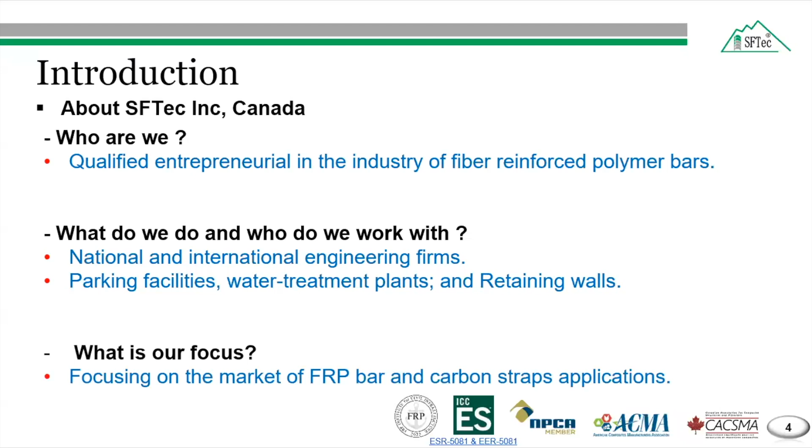So we focus on parking facilities, water treatment plants, retaining walls. Our focus is mainly on glass fiber reinforced polymer bars.

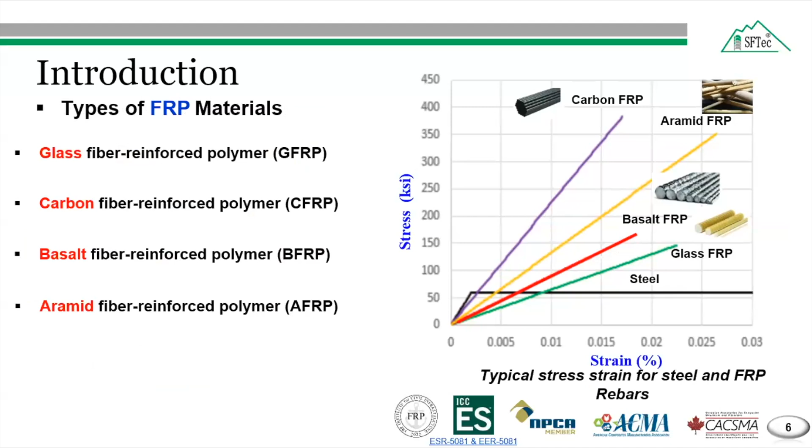There are basically four types of fiber used in fiber reinforced polymer bars: glass, carbon, basalt, and aramid. Glass is widely available nowadays and used in most projects in North America.

We can produce different types of FRP products depending on project requirements. Some of the FRP bars we produce are straight bars, spiral, stirrups for transverse reinforcement, bent bar, and glass fiber reinforced polymer shear connectors.

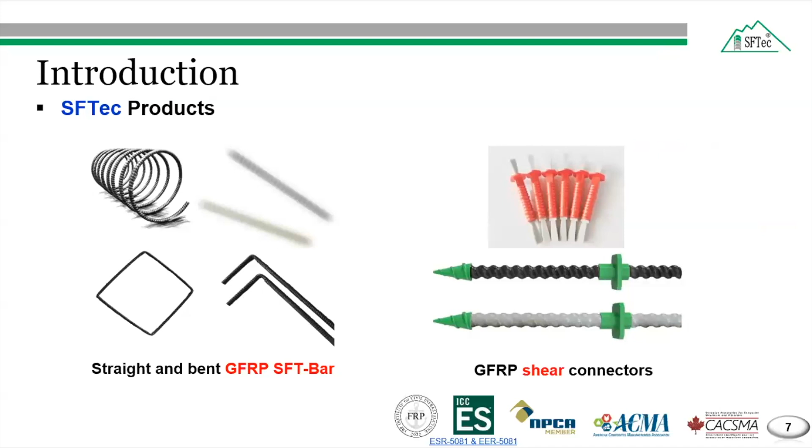Some advantages of the SFTec glass fiber reinforced polymer bar: it has a longer service life because of its corrosion resistance, therefore improved durability in harsh environments such as construction near coastal areas in North American cold climates. The FRP bar has better resistance against corrosion compared to the steel bar.

The tensile strength of FRP bar is around 2 to 3 times more than that of the normally used steel bar.

FRP bars are lighter due to low density compared to the steel bar. Their density is around a quarter of the density of steel.

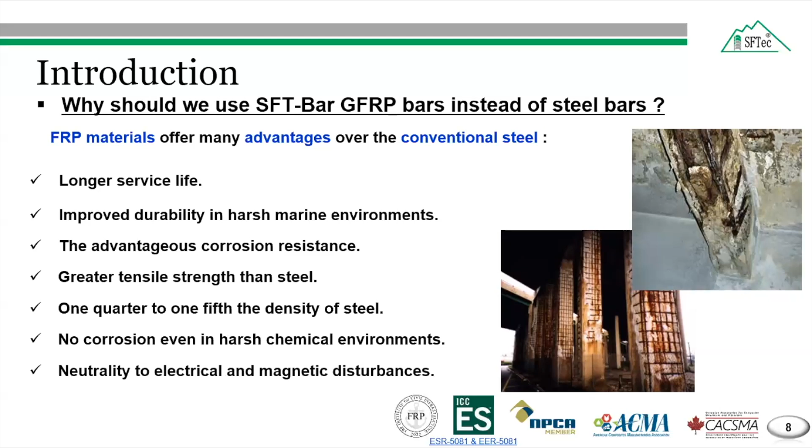Due to corrosion resistance, FRP bar is good for harsh chemical environments as well, and it is neutral to electric and magnetic disturbance, useful for applications such as in airports, military applications, or MRI rooms in hospitals.

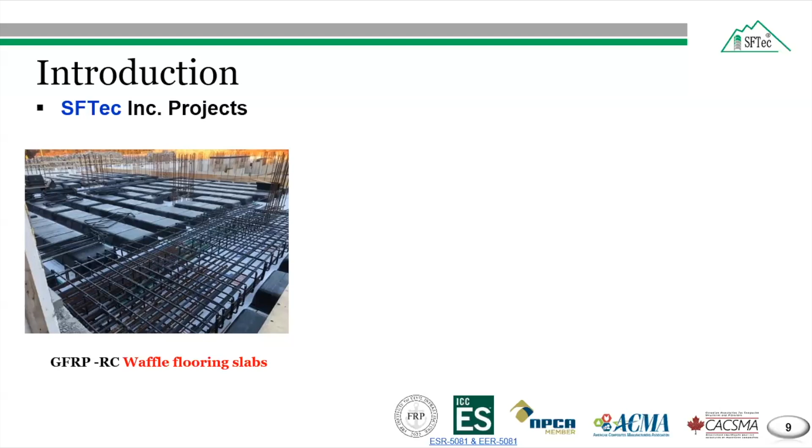Some selected field applications of the SFTec FRP bar we have already done in Canada: a GFRP bar reinforced concrete waffle flooring slab designed with SFTec glass fiber reinforced polymer bar, built in Halifax, Nova Scotia.

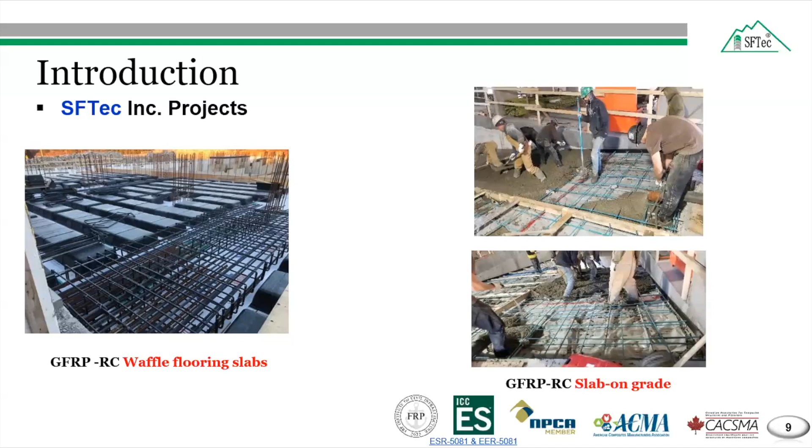It can also be used on slab on grades or slab on grounds, as a non-structural slab. It is a one-to-one replacement and saved a lot of money compared to steel bar in terms of labor and transportation.

Another project is cast on-site precast sandwich panels, where they used our glass fiber reinforced polymer bar as the reinforcement.

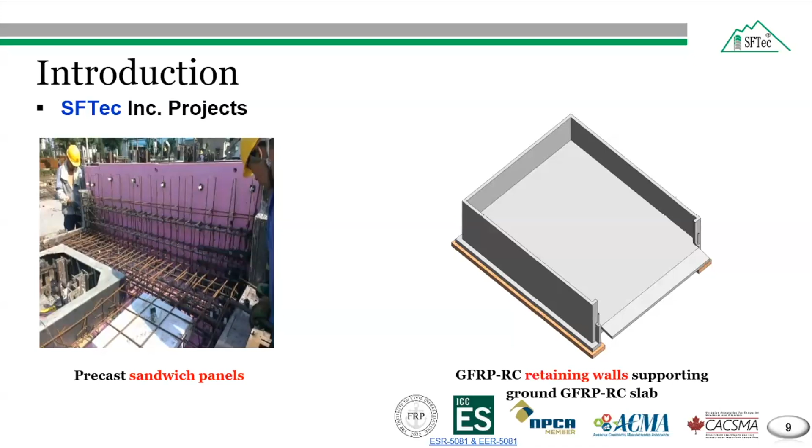On the right is a retaining wall built for the city of Montreal, designed to dump snow with de-icing salt during the winter. They built this retaining wall with SFT glass fiber reinforced polymer bar, which provides resistance against the chemicals used in the de-icing salts.

Coming to the first part of the webinar on SFT-Bar certification: the ICC-ES ESR-5081 certificate evaluates the SFT-Bar, and the scope of evaluation is compliant with the 2021 and 2018 International Building and International Residential Code.

According to the evaluation report, the SFT-Bar is used as tension reinforcement, such as in flexural concrete members, beams, shallow foundations, one-way or two-way slabs. It can also be used as vertical reinforcement in concrete columns and walls.

The SFT-Bar can also be used when engineering design is submitted in accordance with IRC section R301.1.3, and it is approved by the building official in accordance with IRC section R104.11.

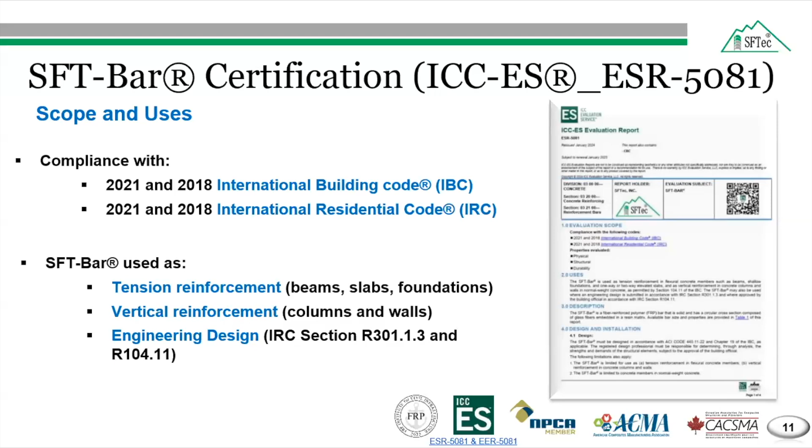ICC uses acceptance criteria AC 454 for fiber reinforced polymer bars for internal reinforcement of concrete structures. The scope of the test program was determined following the requirements given within table 1.2 of ICC AC 454, and it determined the physical, mechanical, and durability properties.

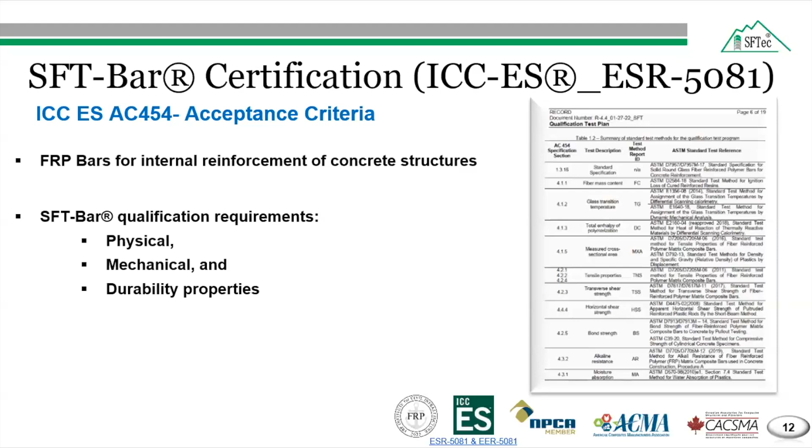The test requirements for all these physical, mechanical, and durability properties are presented in the following slides. Starting with physical properties, four different kinds are required for certification: cross-sectional area, fiber mass content, moisture absorption, and glass transition temperature.

The glass fiber reinforced polymer used in the current certification was produced according to the pultrusion process and made of continuous glass fiber embedded in vinyl ester resin matrix. All the GFRP bars in the study had a helical wrap surface to increase the bond between the bar and the concrete.

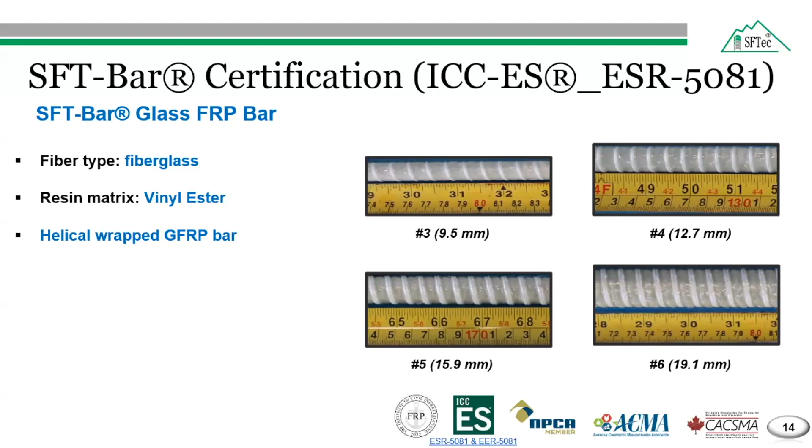Four different types of GFRP bar were investigated: number 3, number 4, number 5, and number 6, which have a nominal diameter ranging from 9.5 millimeters to 19.1 millimeters.

So the volumetric method is used to measure the cross-sectional area, due to the external surface coating of the GFRP bar it doesn't allow calculating an adequate cross-sectional area. The specimen were tested in accordance with the ASTM D7205 and ASTM D792 standards.

The ASTM D792 is used to compute the specific gravity or density of the specimen. The instruments used in the test were a cylinder and measuring scale. The specimen were weighed with an analytical balance to 1 milligram precision.

So 8 samples from each production lot were tested. The total number of lots were 3, and the total number of samples was around 24. Each fiber reinforced polymer specimen was weighed with an analytical balance to 1 milligram precision, and its length carefully measured with a measuring scale.

The specimen were placed in a graduated cylinder filled with water and weighed. Finally, the cylinder was filled with water and weighed.

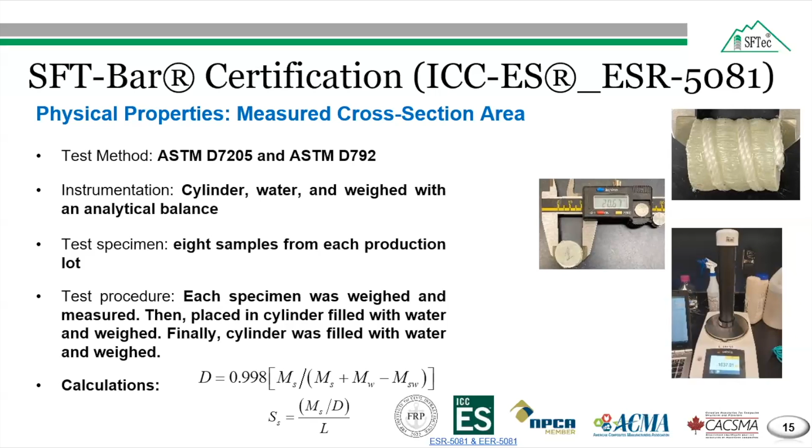The cross-sectional area of the specimen surface in square millimeters was calculated using the second equation, where D is the density of the specimen and 0.998 is the density of water at room temperature. MS is the mass of the specimen, MW is the mass of the water in the cylinder, MSW is the mass of the water and specimen in the cylinder, and L is the length of the specimen.

For the tested helical wrap glass fiber reinforced polymer bars, the averaged measured cross-sectional area was greater than the nominal cross-sectional area as shown in this table, and it was within the required cross-sectional area according to the AC454 acceptance criteria, based on table 3 of ASTM D7957. The AC454 acceptance criteria suggest that requirements should be met according to ASTM D7957.

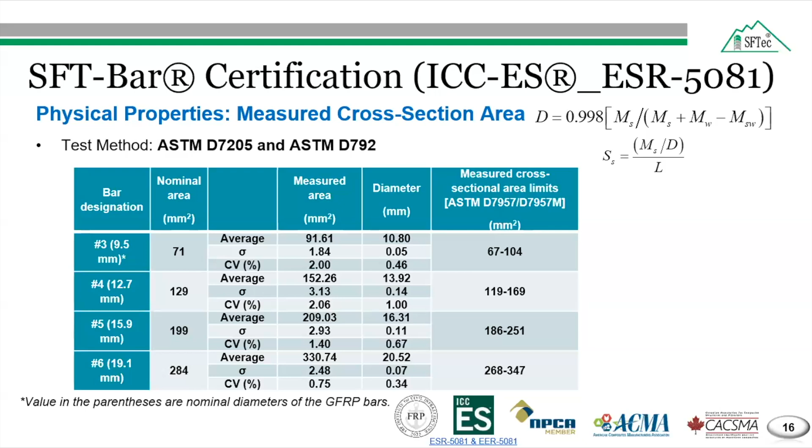In the second test, the fiber content of the GFRP bars was measured, which is an important parameter that determines its mechanical properties. The specimen were cut to 1 inch for fiber mass content and tested in accordance with ASTM D2584.

The instruments used in the test were a muffle furnace capable of maintaining at least 600 degrees Celsius, a desiccator to cool the specimen, and the specimen were weighed with an analytical balance. The 1 inch FRP samples were heated at 565 degrees Celsius until the carbonaceous material disappeared, and the remaining residue was cooled and weighed.

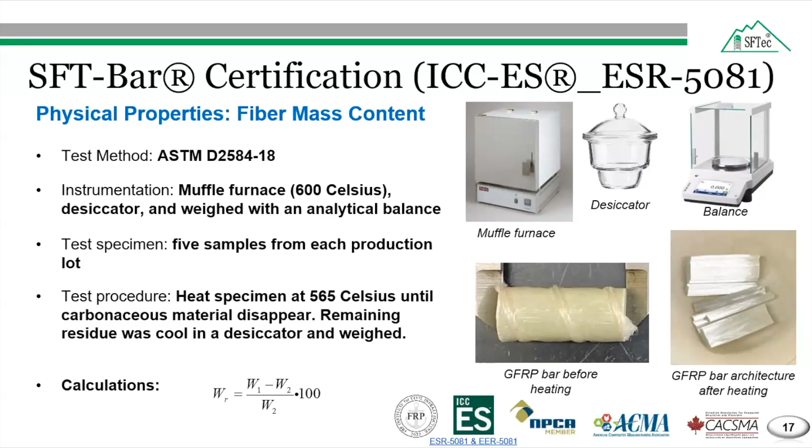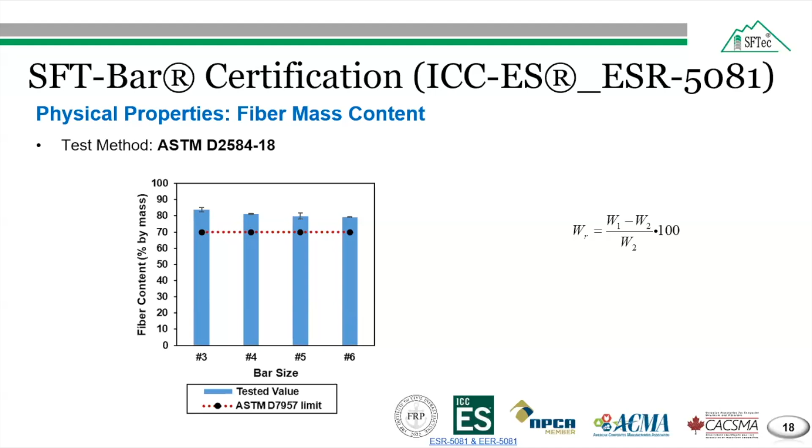The fiber content by weight percent was calculated using the following equation, where W1 is the weight of the specimen and W2 is the weight of the residue. For the tested glass fiber reinforced polymer bar, or the SFT-Bar, the average fiber content was found to be higher than 70%, which is required in ASTM D7957.

The moisture absorption test is important, aimed to prevent excessive moisture absorption that can weaken the bar. This test is important because it tells us what kind of resin is used in our bar, like vinyl ester or polyester resin, so it helps distinguish the type of resin matrix.

The FRP specimen were tested in accordance with the water absorption procedure 7.4 in ASTM D570. The instruments used in the test were a drying oven capable of maintaining the required 50 degrees Celsius, and a water container was used for the absorption. The specimen were weighed with an analytical balance.

The specimen were initially dried in an oven for 24 hours and weighed after cooling in a desiccator. This weight was called the condition weight. After conditioning, the specimen were placed in distilled water kept at 50 degrees Celsius.

The first weighing occurred after 24 hours, then the specimen were immersed in water again. Then we extracted and weighed it every week until we reached the saturation level. Saturation was confirmed when the increase in weight over 3 consecutive measurements was less than 1%.

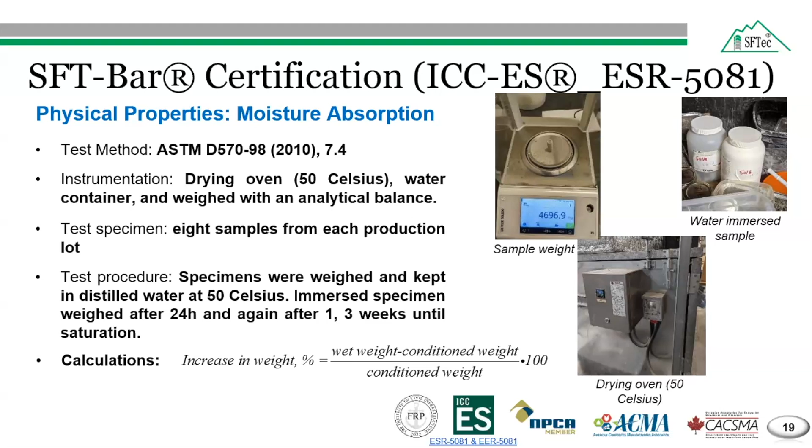The SFT-Bar specimen were tested in accordance with ASTM E1356 to find the glass transition temperature.

The instrument used in the test was a differential scanning calorimeter with aluminum pans. The specimens were weighed, and small size specimens were cut and placed in the heat chamber, which was kept under a nitrogen flow during the scanning procedure. A heating rate of around 10 degrees Celsius per minute was applied.

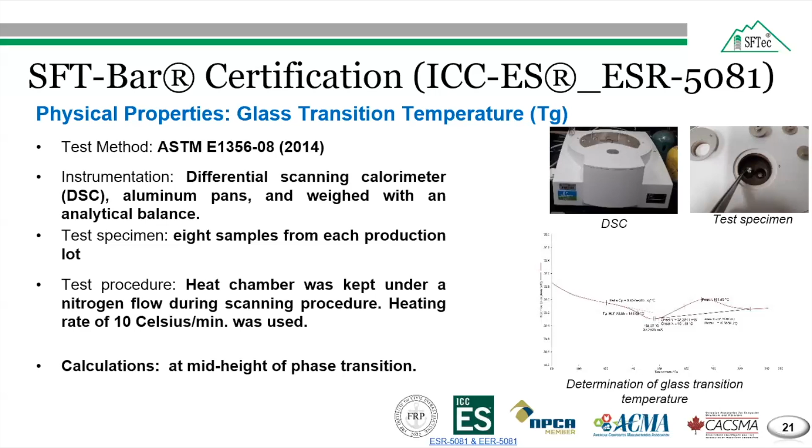The value of the glass transition temperature was taken at the mid height of the phase transition as shown in this figure. For the SFT GFRP bar, the average measured glass transition temperature was greater than the 100 degrees Celsius requirement in ASTM D7957.

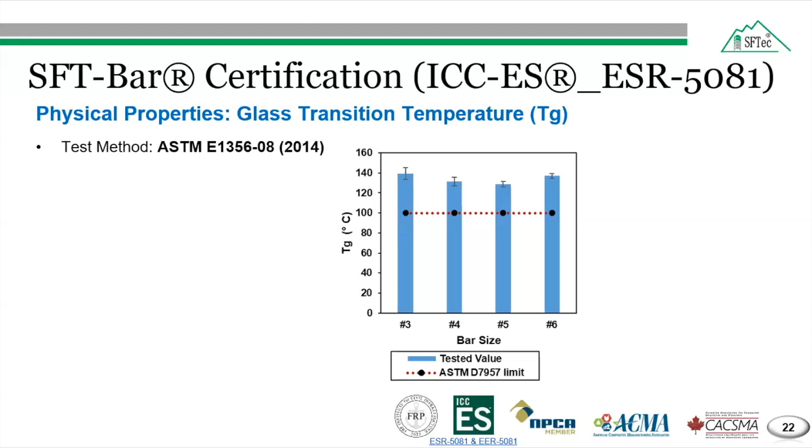Now coming to the mechanical properties, which includes tensile properties, transverse shear strength, and bond strength through pull-out test. The longitudinal tensile properties of FRP specimens were tested in accordance with D7205, and the instrument used in this test were Baldwin testing machine and an extensometer for displacement recording.

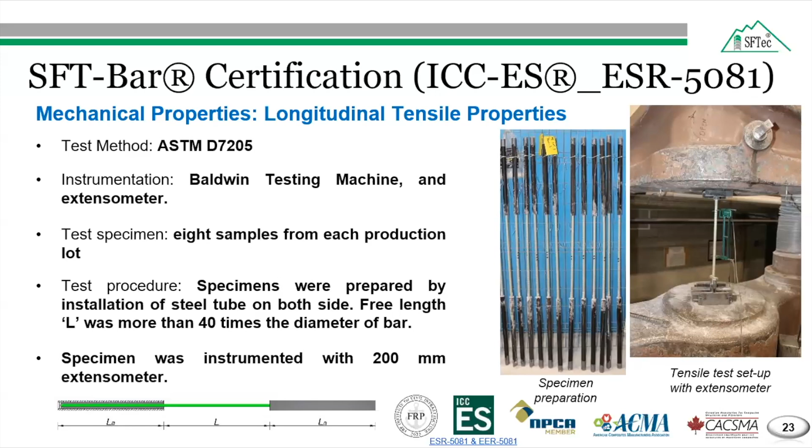The test specimen was prepared by installation of steel tube on both sides of the FRP sample using expansive cement, and the free length was more than 40 times the diameter of the bar. The specimen was instrumented with a 200 millimeter extensometer to capture the specimen elongation during the test, and this test was carried out using the Baldwin testing machine.

The tensile load was applied until failure occurred, and the applied load and the bar elongation were electronically recorded using a data acquisition system. The tensile strength of the FRP bar can be calculated according to the following equation, where Fu is the tensile load in Newton and A is the cross-sectional area of the tested bar in square millimeter.

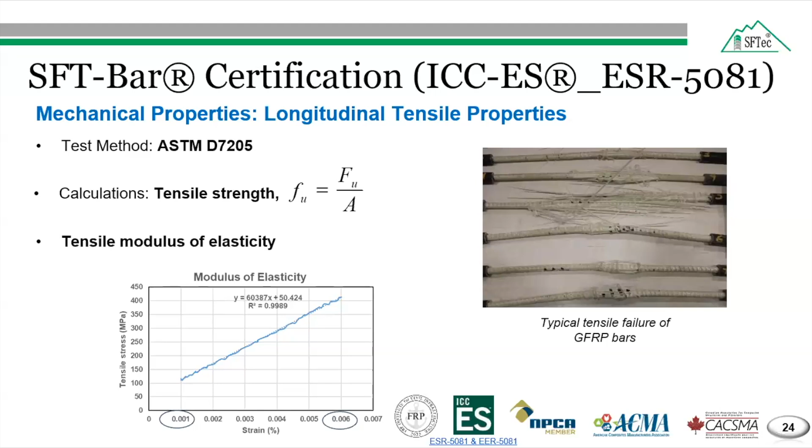The tensile modulus was calculated by fitting a straight line to the data using the method of linear least square regression analysis. The strain range selected for the fitting line was within the lower half of the stress strain curve, with the starting point at a strain of 1000 microstrain and end point being 6000 microstrain.

For the helical wrap glass fiber reinforced polymer bars, the guaranteed tensile properties were greater than the requirement in the ASTM D7957. Here the guaranteed properties means the mean tensile load minus 3 times the standard deviation.

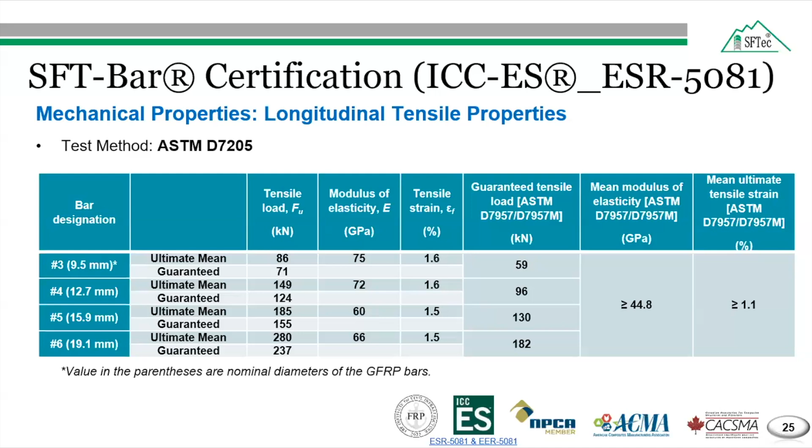The transverse shear strength of FRP specimens were tested in accordance with the ASTM D7617. The test apparatus consists of two bar seats, two lower blades, and two guides machined from steel. These parts are bolted together with two threaded rods, washers and nuts as shown.

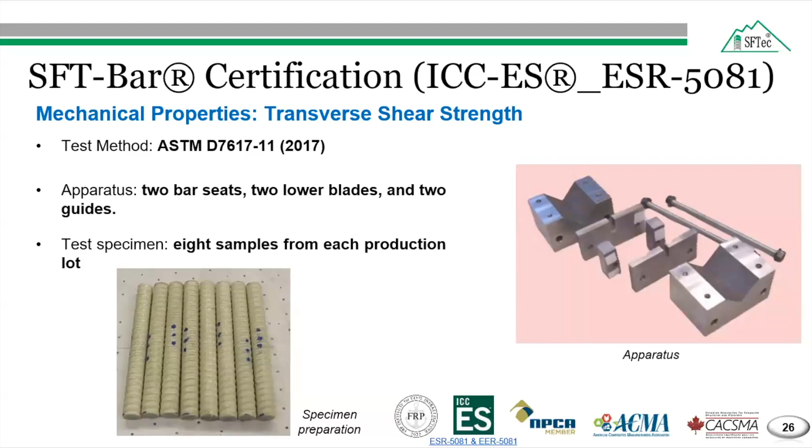The upper blade is loose and is fit into the bar prior to the testing. The length of each specimen, irrespective of the bar size, was 225 millimeter or 9 inches. The specimen was centered within the shear apparatus, resting against the bar seats and lower blades. We placed the upper blade into the bar and centered the apparatus in the MTS universal testing machine.

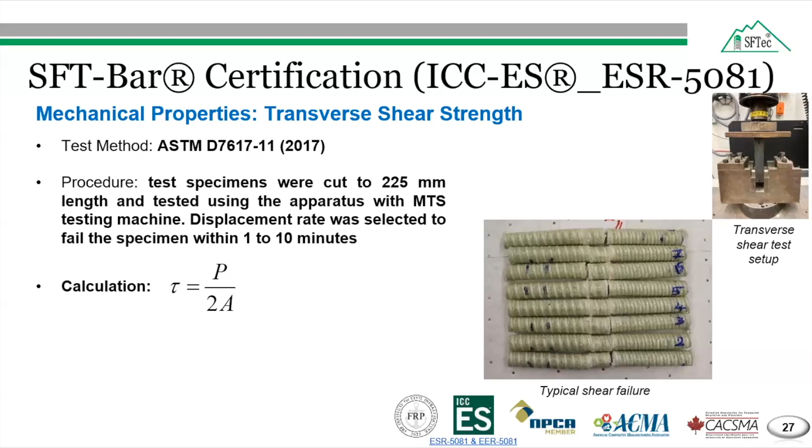The displacement rate was selected so that the product should fail within 1 to 10 minutes, and force was applied uniformly without subjecting the specimen to impact. After testing the samples in the shear apparatus up to failure, the transverse shear strength was calculated using this equation, where P is the failure load in Newton and A is the FRP bar area in square millimeter.

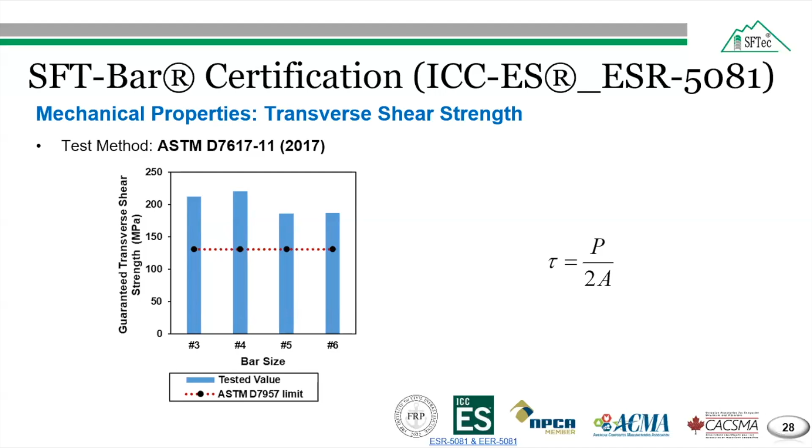For the SFTec GFRP bar, the average transverse shear strength was greater than the 131 megapascal requirement in the ASTM D7957. Coming to the last mechanical property test, the pull-out test, which was performed to measure the bond strength between the reinforcing bar and the concrete.

The test apparatus consists of a bond testing machine, loading plate, LVDT at fixed and free end to measure the displacement, concrete mold, and steel tube.

ASTM D7957 allows bond testing on either odd or even bar size designation if a range of identical produced bar is offered. Therefore, the pull-out tests were conducted on GFRP bar number 3 and 5, which are the odd bar sizes.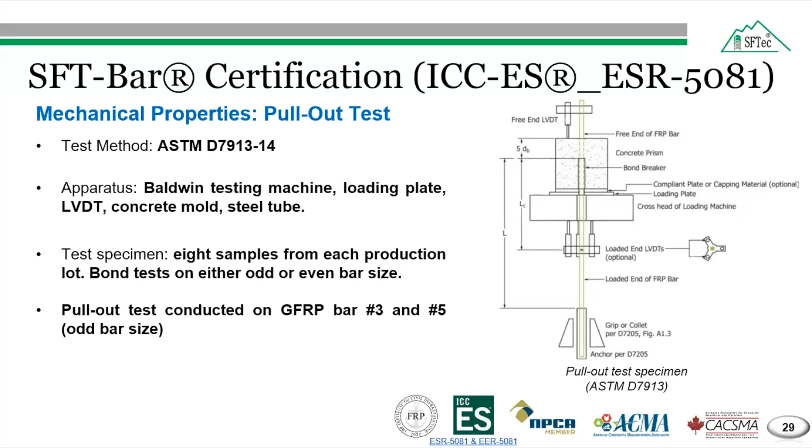The GFRP bars were embedded in the concrete blocks after applying the steel pipe anchor to one end of the bar as shown in this figure. The free length of the GFRP bar between the block and the anchor was approximately equal to 40 times the diameter of the bar.

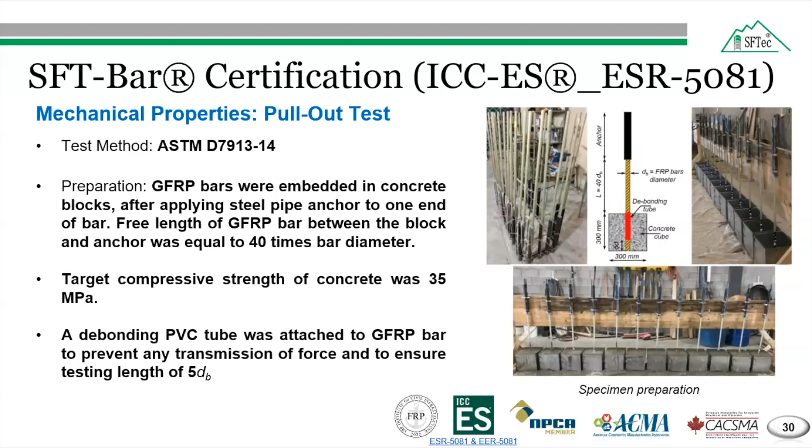All the test specimens were prepared using one concrete batch, having a target compressive strength of 35 megapascal. A debonding PVC pipe was attached to the GFRP bar to prevent any transmission of force by the bond between the bar and the concrete, to ensure a testing length of 5 times the diameter of the GFRP bar.

A displacement control test was conducted at the rate of 20 kilonewton per minute using the universal testing machine. The GFRP bar slippage was monitored using one linear variable differential transformer, and the applied load and bar slippage were recorded automatically throughout the test with a computerized data acquisition system.

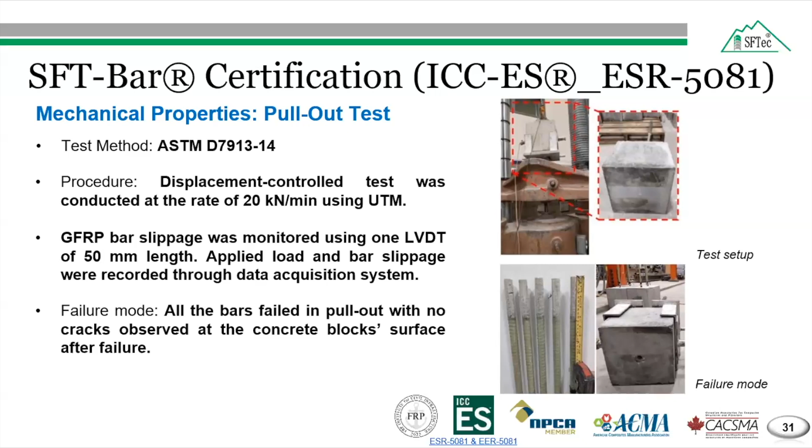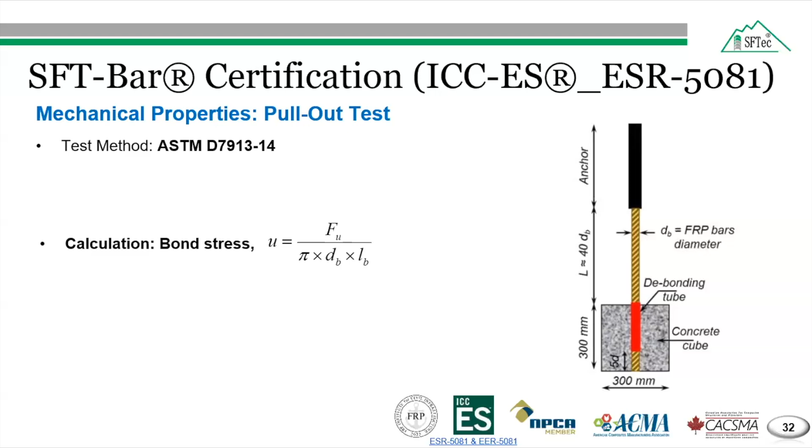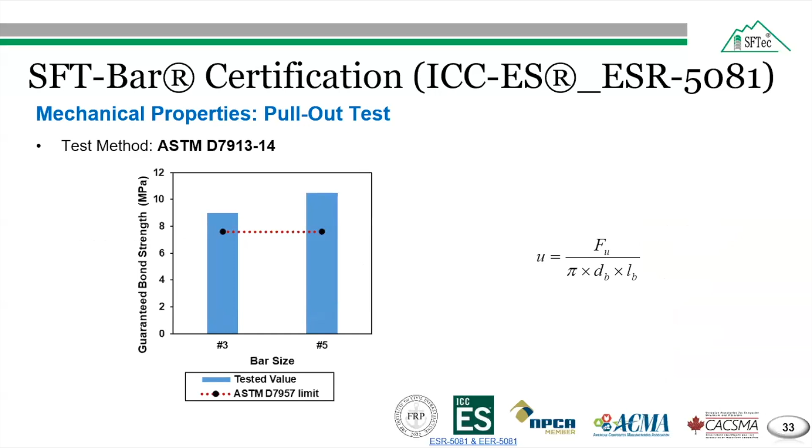All the bars failed in pull-out failure with no cracks observed at the concrete block surface after failure. The bond stress at the peak load was calculated assuming a uniform bond stress distribution along the embedded length of the GFRP bar in concrete, equal to 5 times the nominal diameter of the bar. For the SFT-Bar, the average bond strength was above the requirement of around 7.6 megapascal as per ASTM D7957, and both number 3 and number 5 exceeded this requirement.

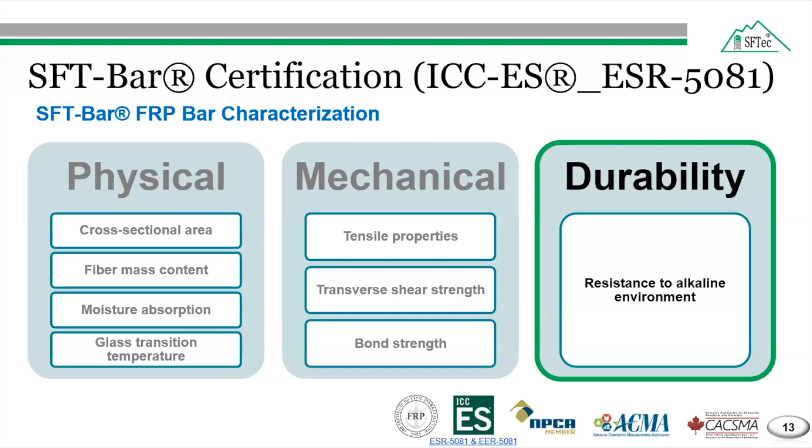The only durability or aging property required on the SFT-Bar for certification was the alkaline resistance without any applied sustained load. The alkaline resistance of the SFT-Bar was determined post-accelerated aging exposure immersed in a high pH solution without any applied sustained load, as per ASTM D7957. The instruments used were the Baldwin machine and extensometer for displacement recording and a chamber to maintain 60 degrees Celsius temperature.

Once exposed in a high pH solution, the testing process which followed was according to ASTM D7205, for the tensile properties of the FRP bar. The ASTM D7957 allows alkaline resistance testing on either odd or even bar sizes, so the alkaline resistance test was conducted on GFRP bar number 3 and 5 only.

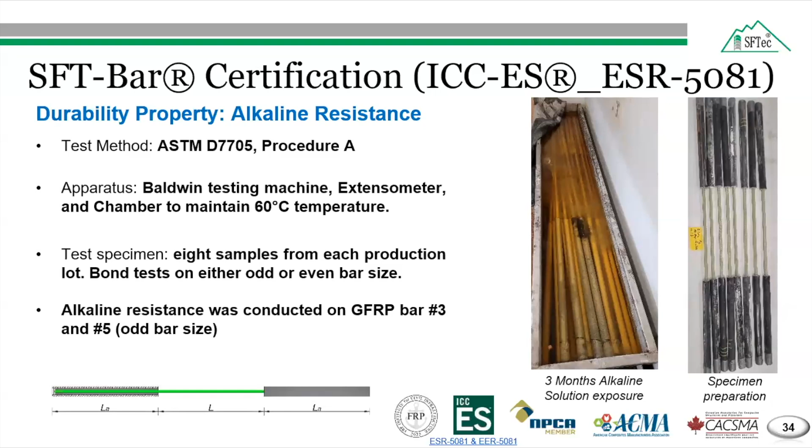The test specimen was prepared similarly to the tensile property preparation after exposure. We installed steel tubes on both sides of the FRP sample using expansive cement. The specimen was instrumented with a 200 millimeter extensometer to capture elongation during the test, and the test was carried out using the Baldwin testing machine post-accelerated aging in a high pH solution, with exposure for at least 3 months at 60 degrees Celsius. The tensile load was applied until failure occurred, and the applied load and bar elongation were electronically recorded using a data acquisition system.

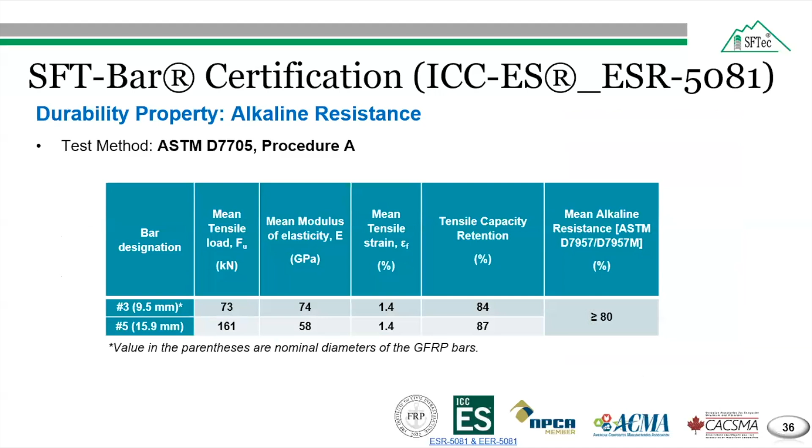The experimental tests presented for the mean alkaline resistance, based on the mean tensile load, are summarized in this table. We saw that the AC454 acceptance criteria has been met based on Table 1 of the ASTM D7957 specification, which requires equal to or more than 80% of the mean tensile load of the unexposed GFRP bars.

The SFT-Bar must be designed in accordance with ACI 440.11-22 and Chapter 19 of the International Building Code. The SFT-Bar is used in tension reinforcement such as flexural concrete members, beams, slabs, or foundations, and vertical reinforcement in concrete columns and walls.

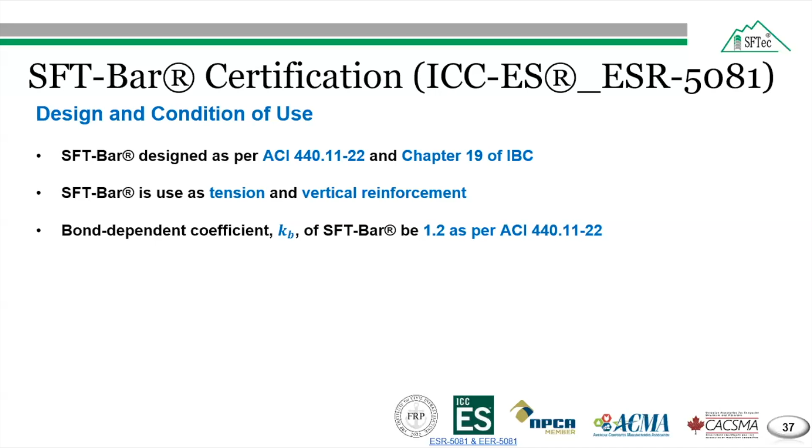The bond-dependent coefficient accounts for the degree of bond between the FRP bar and surrounding concrete in ACI design standard, and should be taken as 1.2 for the SFT-Bar, as per ACI 440.11. The analysis of the flexural capacity must be based on a strain compatibility approach, similar to steel reinforcing bars. The reinforcement details, minimum concrete cover, and installation should comply with the provisions of ACI 440.5.

If you are using the SFT-Bar, it should be stored above the surface of the ground on a platform or other support, as close as possible to the point of placement. If storing the SFT-Bar outdoors, it must be covered with opaque plastic or other types of cover that will protect the bar from ultraviolet rays.

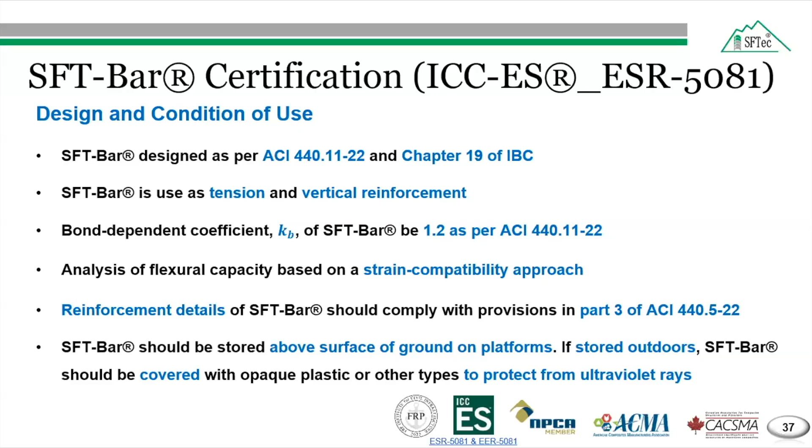So coming to the next presentation, it will be presented by Dr. Albedi. Thank you, Girish. Thank you, Rick.

Now I will take you through the second part of our presentation, focusing on a guide to ESR-5081. In this segment, we will cover the evaluation of ESR-5081, its applications, the reasons why ESR-5081 is a vital choice for engineers, and conclude with practical design examples.

What is ESR-5081 certification? It is an equivalency evaluation report that certifies our SFT bars for specific applications. It is issued in March, revised in June 2024, and renewed every year. It should be mentioned that the calculations and results of the respective EER tables are based on ICC ESR-5081.

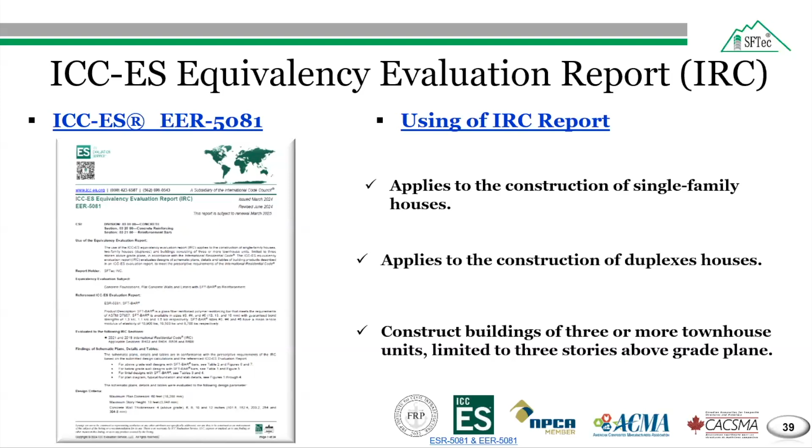This certification is guaranteed by the ICC Evaluation Service, ensuring that our products meet the required standards and are approved for use in designated projects, including the construction of single-family houses, duplexes, and buildings of 3 or more townhouse units.

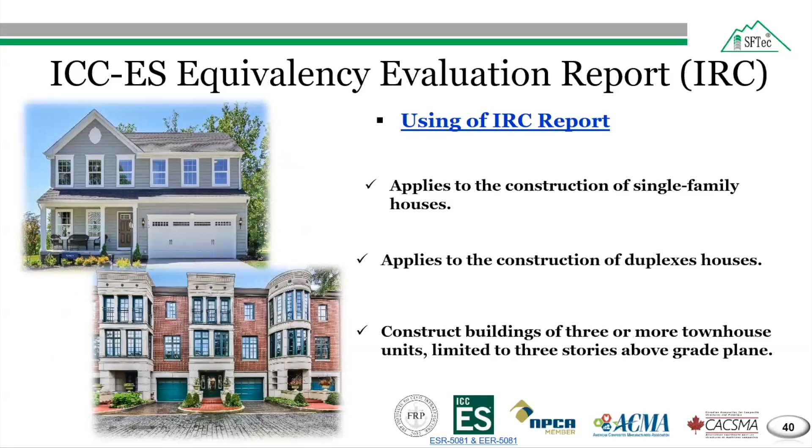Limited to 3 stories above grade plane.

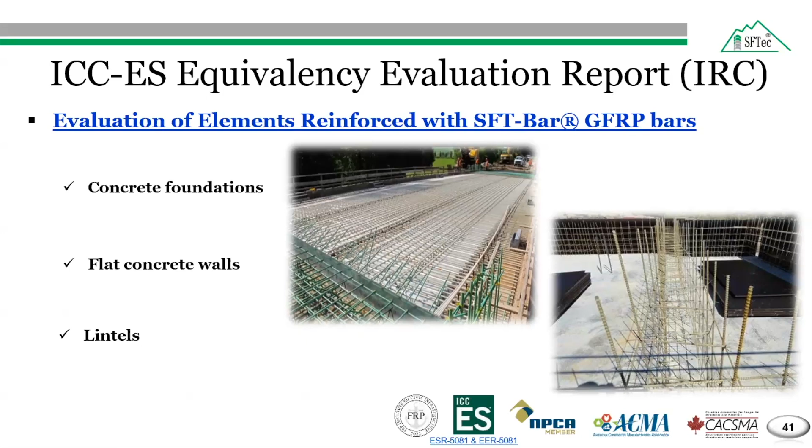In EER-5081, the evaluation and performance of structural elements, including concrete foundations, walls, and lintels, when reinforced with SFT-Bar GFRP bars, are comprehensively reported. What sizes of SFT GFRP bars are used in ICC EER-5081 applications? 3 bar sizes of number 3, number 4, and number 5 were used to reinforce the applications in EER-5081.

All bars are characterized based on the AC 454 acceptance criteria of the ICC. It should be noted that the properties of SFT bar are presented in ESR-5081, as my colleague Girish presented earlier.

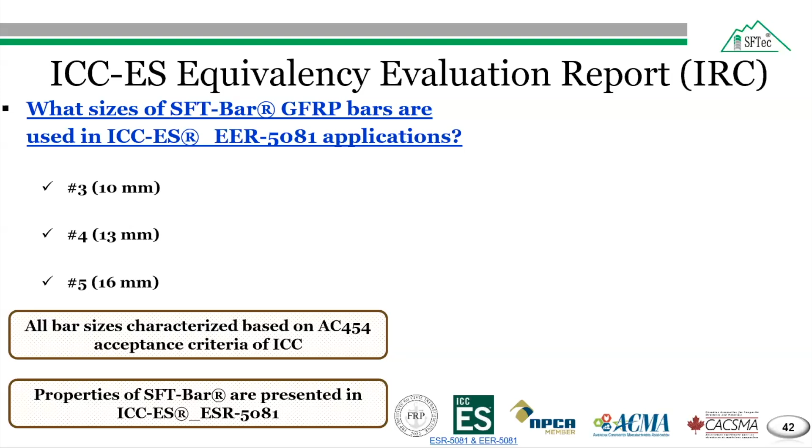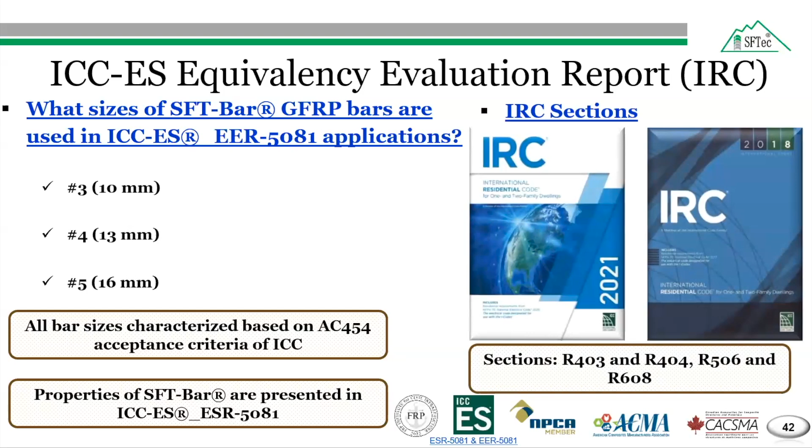Additionally, the evaluation in EER followed the 2021 and 2018 International Residential Code, IRC. Specifically, sections are R403, R404, R506, and R608.

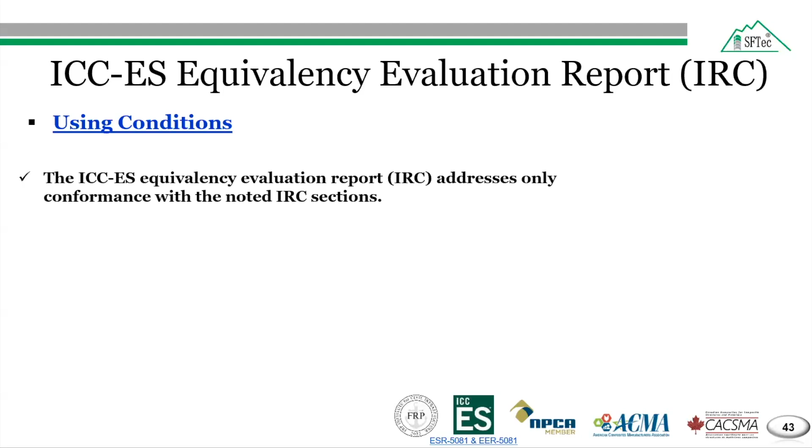In this slide, there are some conditions to use EER as follows. The ICC Equivalency Evaluation Report addresses only conformance with the noted IRC sections. This report applies only the design parameters submitted for review by ICC-ES.

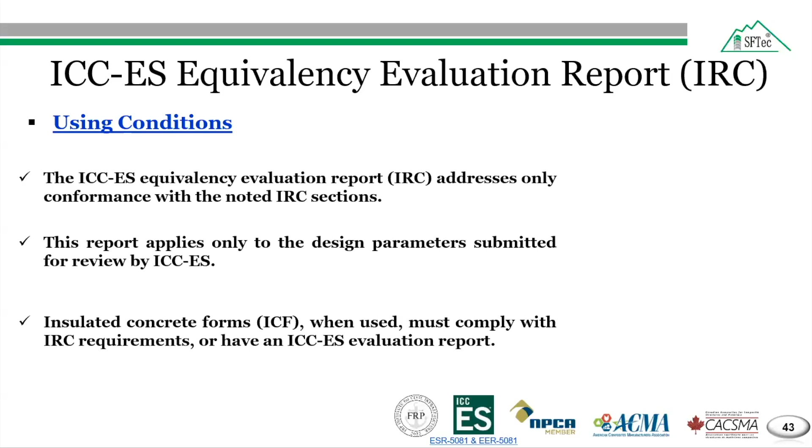For insulated concrete forms, ICF walls, when used, it must comply with the IRC requirements or have an ICC-ES evaluation report. The design criteria in this report or in this certification: risk category 2, 2 stories above grade, and seismic load A and B, while seismic category C is for basement wall only.

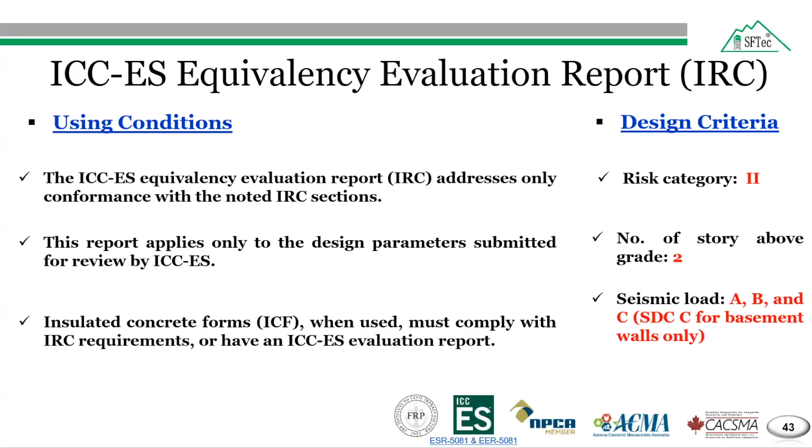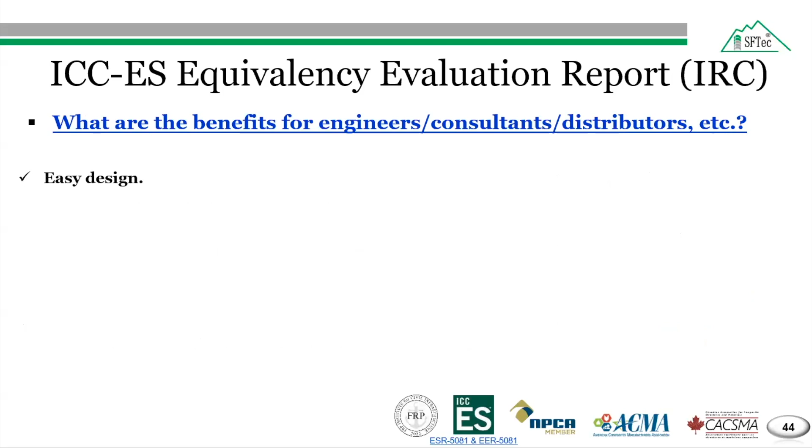Let's explore the benefits for engineers, consultants, and distributors when using our EER certification. Ease of design: it simplifies the design process for structural elements, including concrete walls, lintels, and foundations. Safety assurance: our report ensures that the designs comply with the ACI 440 code and its requirements.

It should be noted that compared to same certification with other available GFRP bars in the market, we have increased the safety factors to ensure a safer design.

Global usage: the EER certificate can be used for designs in Canada, the USA, and worldwide, providing trustworthy tables for building design. Finally, this report is introduced by our expert engineers and top consultant design office, ensuring a high reliability and quality.

EER-5081 comprises tables and drawing details. For tables, wall designs above grade are reported in tables 2, 6, and 7. Walls designed below grade are reported in tables 1 and 5, and tables 3 and 4 show the designs of lintels. For drawing details, 1 through 4 show plan diagrams and section details for walls and foundations.

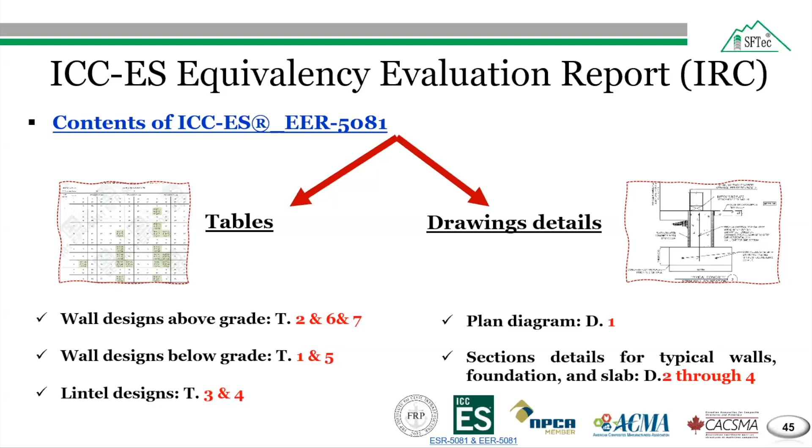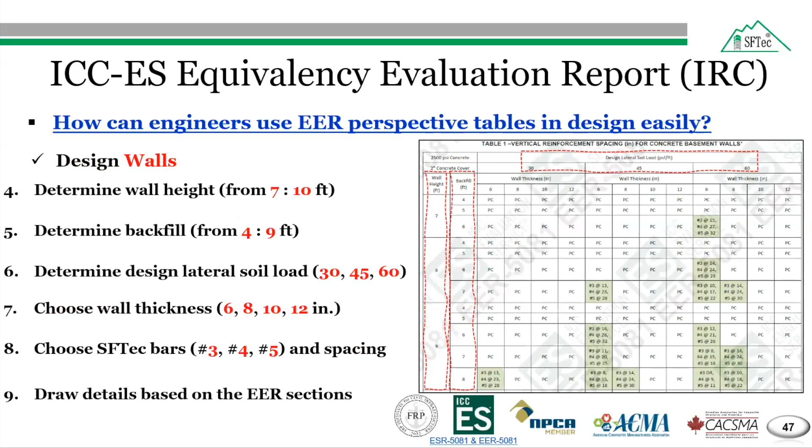Number 4, determine wall height from 7 to 10 feet. Number 5, determine backfill height from 4 to 9 feet. Number 6, determine the lateral soil load: 30, 45, or 60 pounds per square feet. Number 7, choose the wall thickness from 6, 8, 10, 12 inch. And finally, choose SFTec bars, bar number 3 or number 4 or number 5, and each spacing.

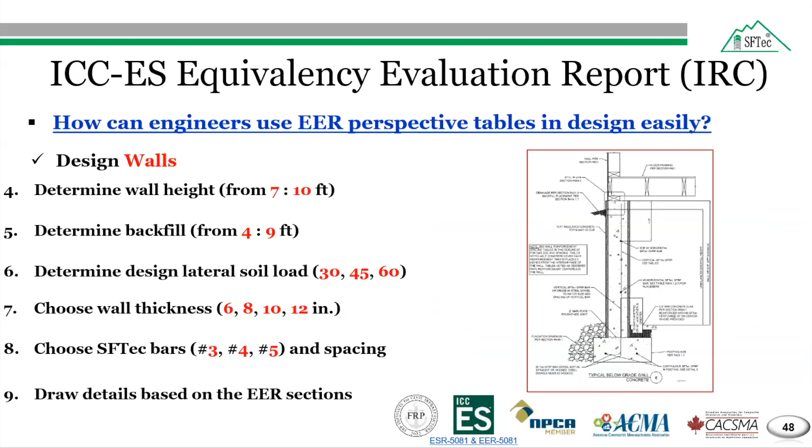Finally, draw details based on the EER sections. Secondly, how can engineers easily employ EER tables in lintel designs?

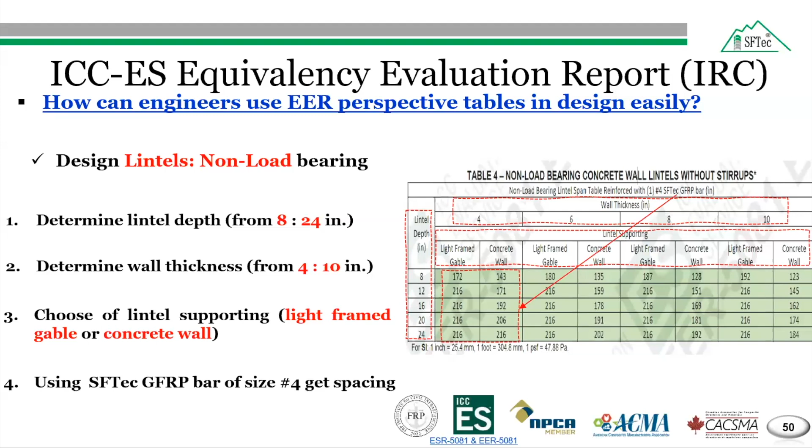Number 3, choose the lintel supporting from light framed gable or concrete wall. Finally, using SFTec GFRP bar of size number 4, get the spacing.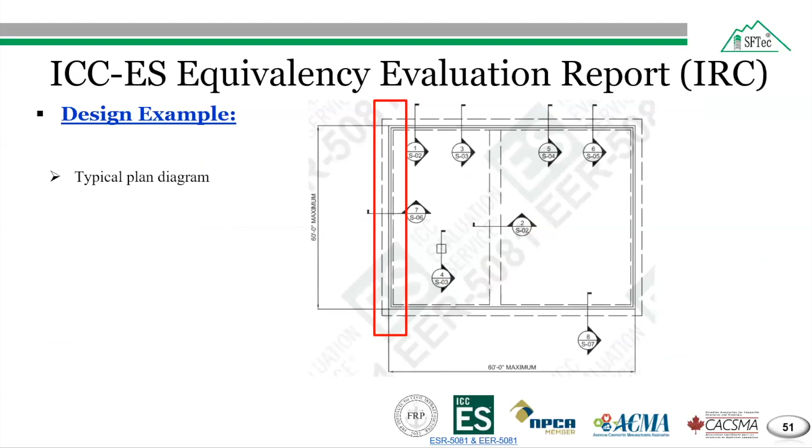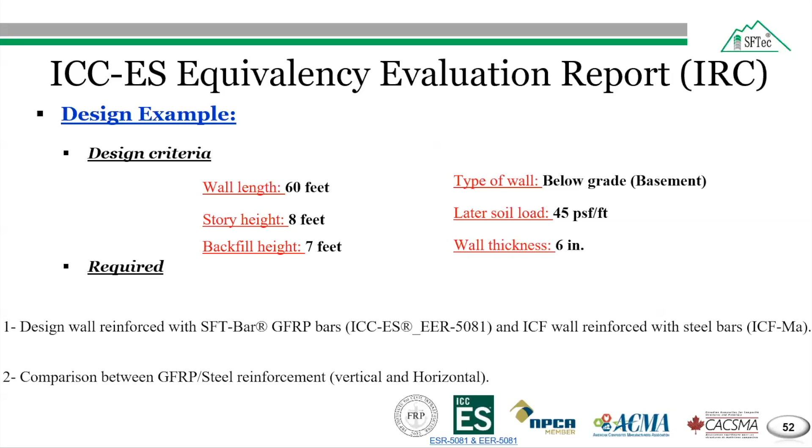The following slides present a design example of a typical plan diagram. In the shown plan, we will focus on designing one wall, as shown in this slide. The design criteria are as follows, and it's required to design a wall reinforced with SFT GFRP bars based on EER-5081 certification, and the other solution with ICF wall reinforced with steel bars based on ICF-MA tables. Finally, make a comparison between GFRP and steel reinforcement, both vertically and horizontally.

The design data provided in EER-5081 and ICF-MA tables are shown in this slide. It should be noted that the bars in both solutions have 2-inch concrete cover.

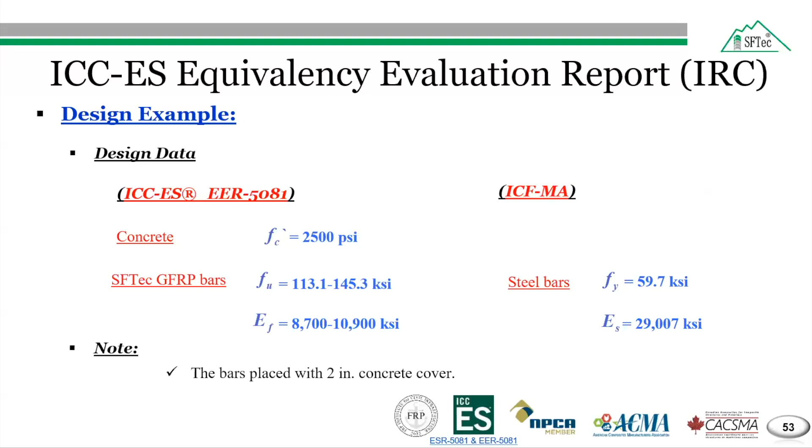Beginning with the solution of RC wall using SFT GFRP bars based on EER-5081, we will first outline the steps for analysis and design. Choose number 1, basement wall.

Choose the concrete strength, 2,500 PSI. Choose 2-inch concrete cover in number 3. In step 4, choose the wall height, 8 feet.

Number 5, choose the backfill height in step number 5 as 7 feet. In step 6, choose 45 PSF for design lateral soil load. In step 7, choose wall thickness of 6 inch.

Finally, based on table 1 of the EER-5081 certification, we will utilize the SFT GFRP bar number 5 with a spacing of 28 inches as vertical reinforcement in the RC wall. For horizontal reinforcement, we will follow the guidelines provided in the footnotes of the EER report. This entails placing one number 3 bar within 12 inches of the top of the wall and one number 3 bar near the mid height as specified in table

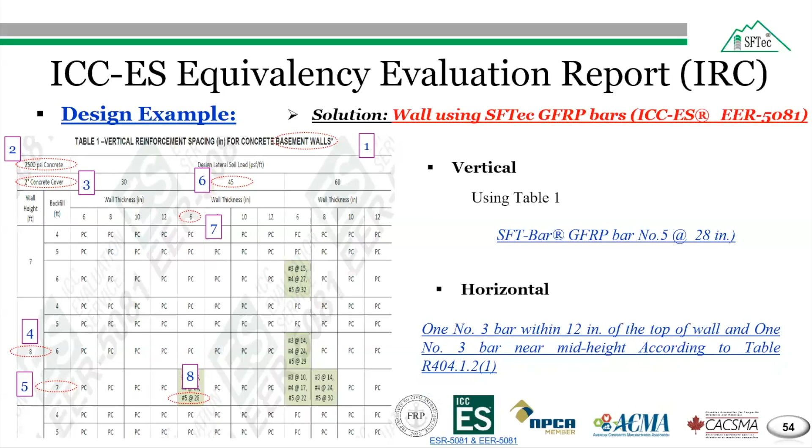R404.1.2. To design the same selected wall using an ICF wall reinforced with steel bars based on ICF-MA tables, we will follow the specifications provided: wall height, backfill height, the lateral soil load, the wall thickness, and finally using steel bar M15 at 18 inch as in table B11 in vertical direction, and horizontally we will use steel bar 10M at 16 inch.

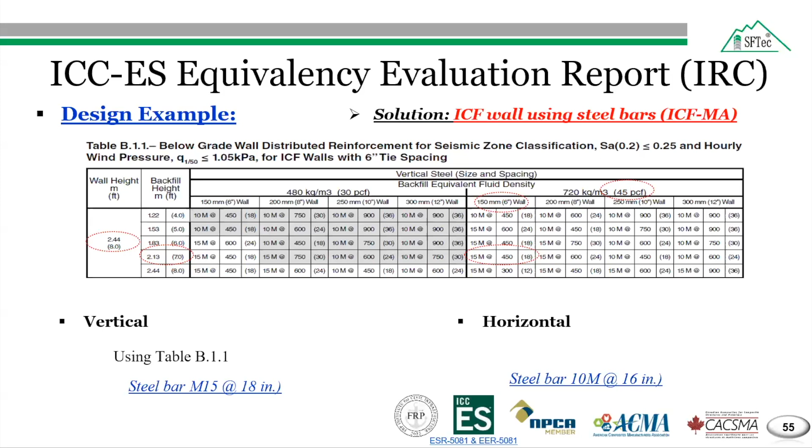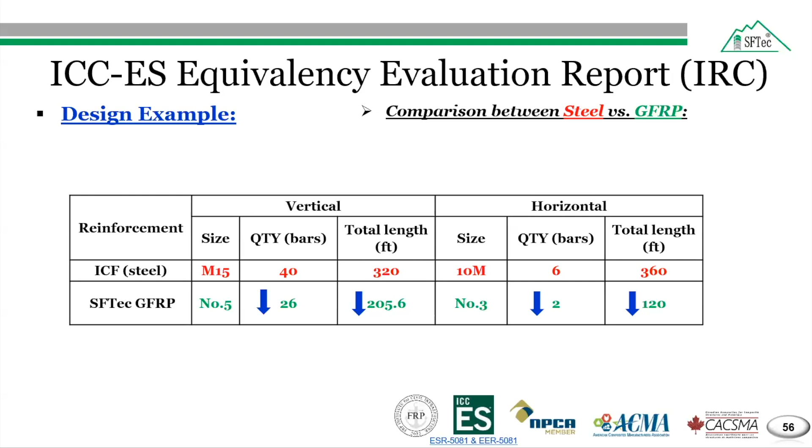This slide shows a comparison between steel and SFT GFRP bars. The table demonstrates that RC walls reinforced with SFT GFRP bars based on EER-5081 is considered the most economical solution, beside other benefits of using GFRP bars such as corrosion resistance along the service life. Finally, the conclusions can be listed as follows.

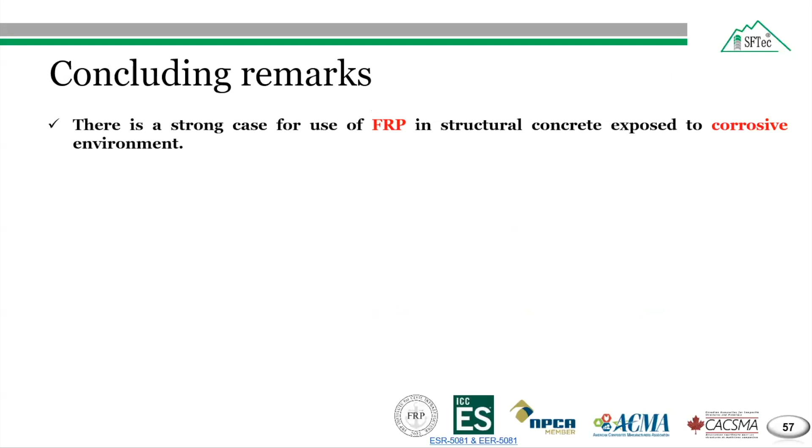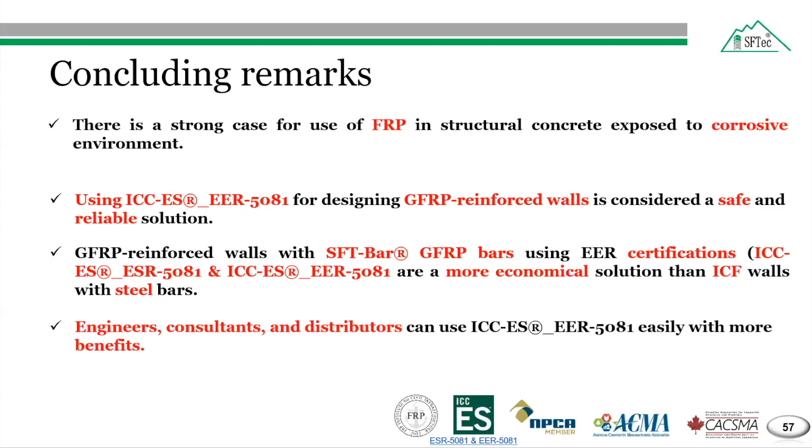There is a strong case for use of FRP bars in structural concrete exposed to corrosive environment. Using EER-5081 for designing GFRP reinforced walls is considered a safe and reliable solution. GFRP reinforced walls with SFT GFRP bars using EER certifications, ESR and EER-5081, are a more economical solution than ICF walls with steel bars. Finally, engineers, consultants, and distributors can use our EER-5081 easily with more benefits.

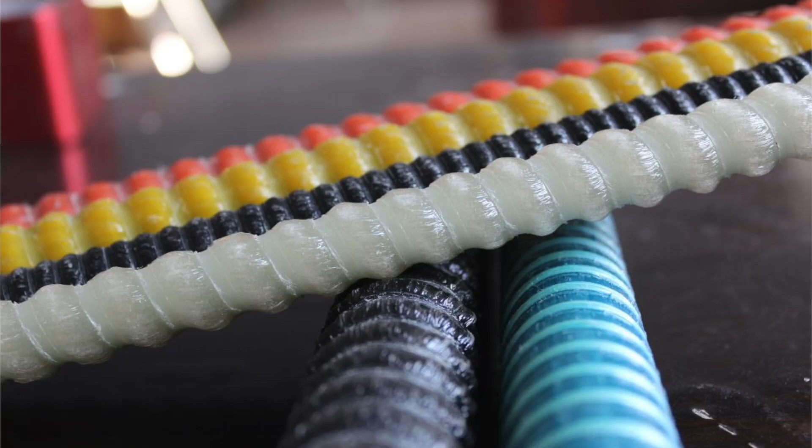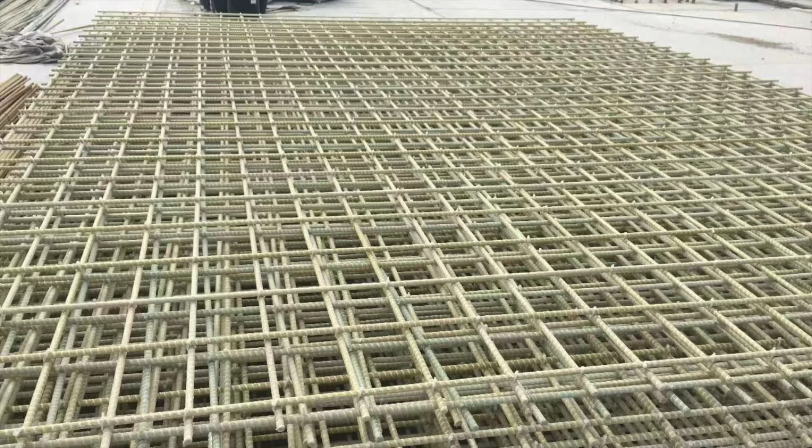First, going back to the ESR report, which is the part Dr. Girish explained, I would like to highlight that most of our competitors have ESR reports for one or two sizes only, so it can be a little bit confusing. Always double check their certificates. If you're designing with, let's say, number 5, which is 15 millimeter, make sure they have the ICC-ESR for number 5, not just for number 3 or 4, which is what most of the competitors have.

A lot of them also have tested for non-structural applications. Having the ICC-ESR certificate does not necessarily mean you can use the bar for structure. It just means it passes certain mechanical specs that it has been tested for. It doesn't mean it has been tested for everything that makes it reliable for structural elements.

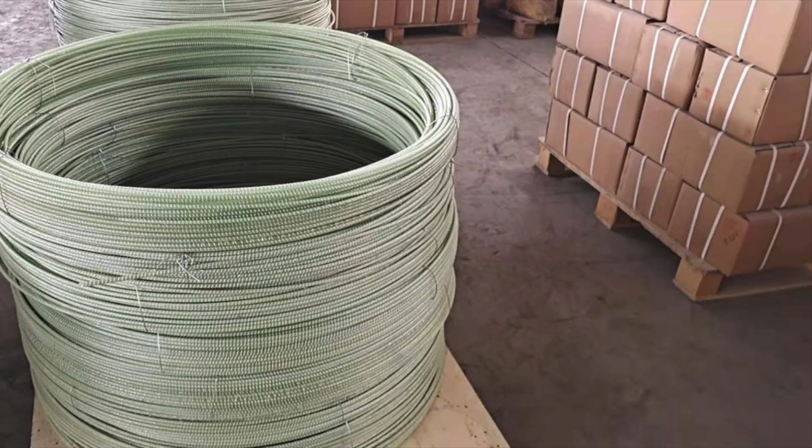One last thing regarding the ESR report is that our bars exhibit, if you pull out all the ESR reports published on the ICC website today, the highest specifications among all of the competitors. Some of them actually have a big difference. So when we tell you we are at least one of the top bars in the market, we're not saying this because it's our bar, we're saying it because of the ICC certificate that proved our claims.

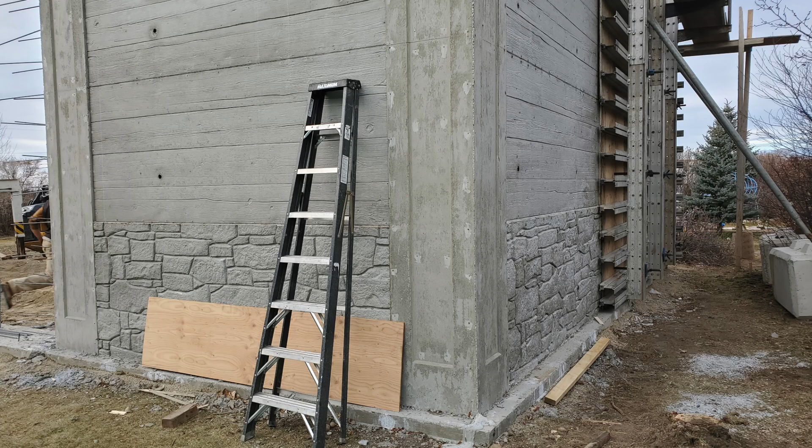Now going back to Dr. Ahmed's part of the presentation, the EER report. Also from a sales perspective, there's only one competitor that has the EER report. You will notice because of the difference in specifications between us and the competitor, our spacing is slightly larger than theirs. So basically using our bars will save you a little bit more.

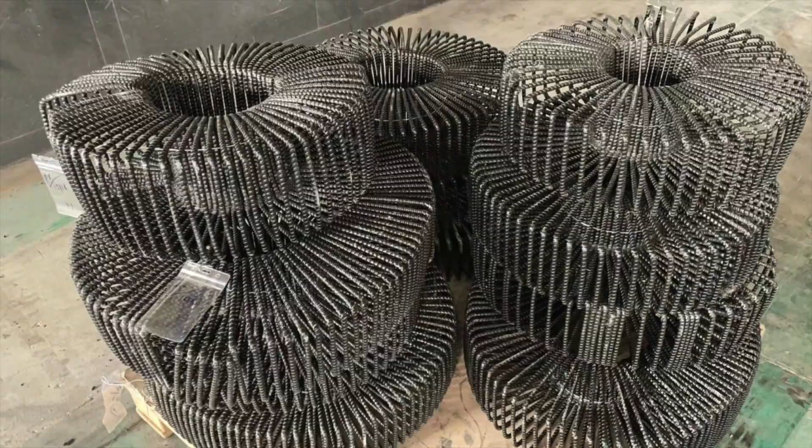On top of that, we know for a fact that our bars are more competitive in price, one-to-one comparison. Also, the EER report, in a lot of municipalities, especially the smaller ones, has been accepted across a lot of municipalities across the US, meaning it's accepted as an equivalent design to steel bars or steel bar tables in the IRC code. So in some cases, they do not require extra engineering, which is a good plus for resellers or contractors doing these types of works.

It saves a little bit of money, especially talking about residential applications, since this is the IRC code, not commercial. So I just wanted to add these comments.